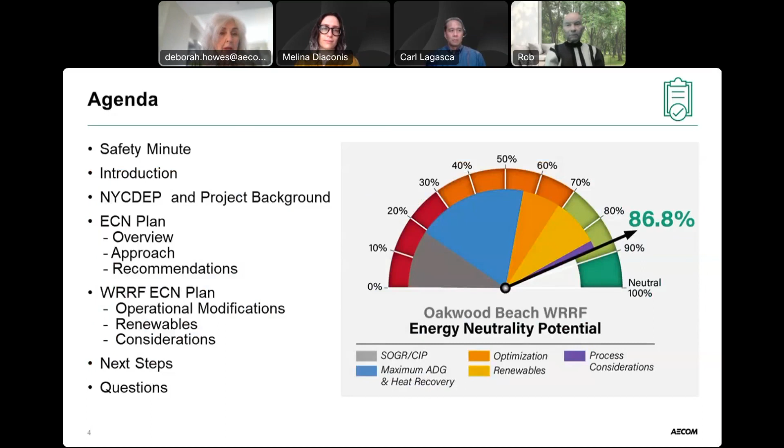So in terms of that sustainability moment, some things you can do to really save some energy. Decreasing the brightness of your screens can save quite a bit of energy, I think it's like 20% savings. Another thing you can do is, remember how we were told it's going to be a paperless world? We never got there. But we have been saving a lot of our documents, draft after draft after draft, digitally. And if you ever looked at your hard drive or your C drive or other disk areas, you're finding you're piling up so many versions, and you don't need that. That's wasting energy, turns out. Please spend a little bit of time, weekly, monthly - yearly is really too long a period to go - and clean those out, delete them. Please do that.

All right, now I want to introduce you to some amazing, really brilliant people, I call them warriors of the rainbow, saviors of the planet, because these are the people who are really moving us forward on the path we have to go. Carl Lagasca is a vice president with AECOM and an Envision Sustainable Professional, with over 25 years of experience in facility planning, design, services during construction, and program management for water and wastewater treatment projects. He has extensive experience, particularly with energy-related projects for the New York City wastewater treatment facilities. He has been the design manager for the development of the New York City DEP Energy and Carbon Neutrality Plan on the New York City DEP Wastewater Resiliency Program. He is our design manager, VP, and professional engineer for the New York City DEP Energy and Carbon Neutrality Plan. Carl, thanks so much for bringing this back to us.

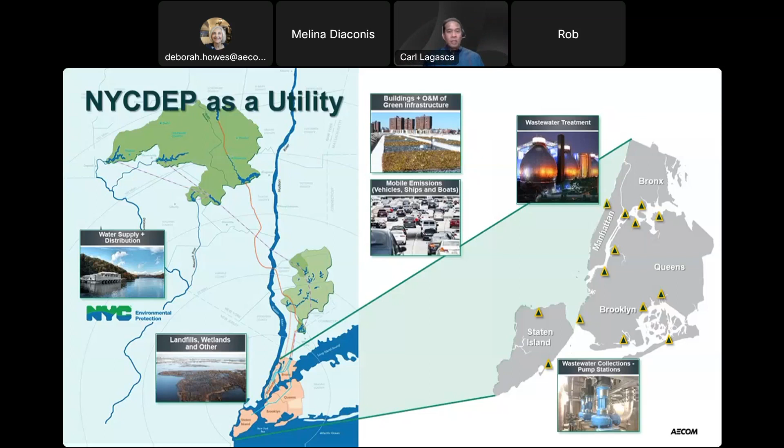In addition to all these buildings and assets, DEP also oversees the management of acres and acres of watershed, forestry, and wetlands. So this is supposed to show how much DEP is in charge of, and what we had to grapple with when producing an energy and carbon neutrality plan, and all the things that came into play.

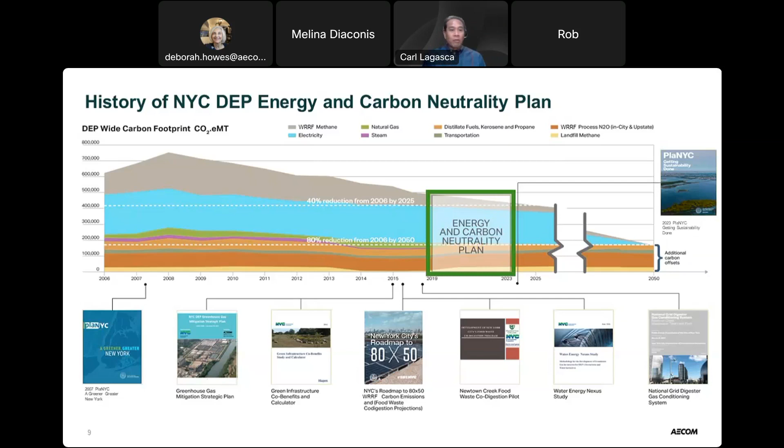So what I'm going to do now is hand over the presentation to Robert and Melina, who led a lot of the technical work of this energy and carbon neutrality plan, specifically on that wastewater sector and the contributions. What they're going to do is walk us through AECOM's approach, our decision making, the evaluations, and all the recommendations for those energy and carbon measures that were proposed for these different wastewater resource facilities. So, Rob, if you want to take us through.

Sure. Thank you, Carl. I'm going to pick up where Carl left off. I'm going to do a quick overview and maybe repeat some things, and then I'm going to focus in on the approach and leave the recommendations for Melina.

So what you see here is what Carl had mentioned, now in writing. On the left-hand side are the DEP objectives, and that's important because the municipality needs to come up with the goals. What are the goals so we can achieve those? In this case it was 80% greenhouse gas reductions by 2050. And for other facilities, just simply go by a date — carbon neutrality by a date, in this case 2050, agency-wide, but energy neutrality in all in-city plants.

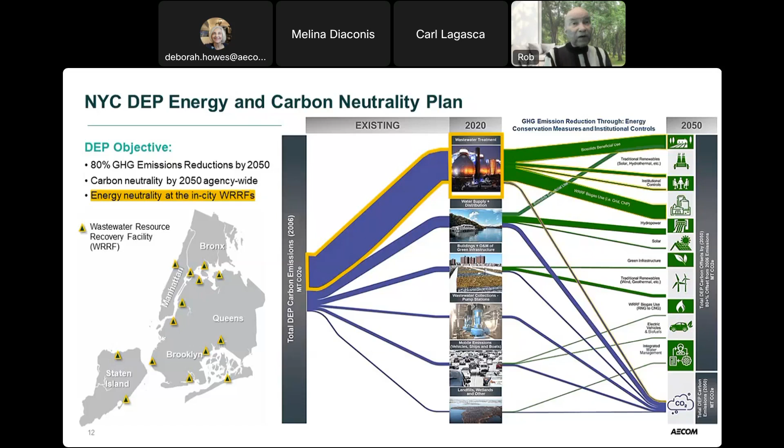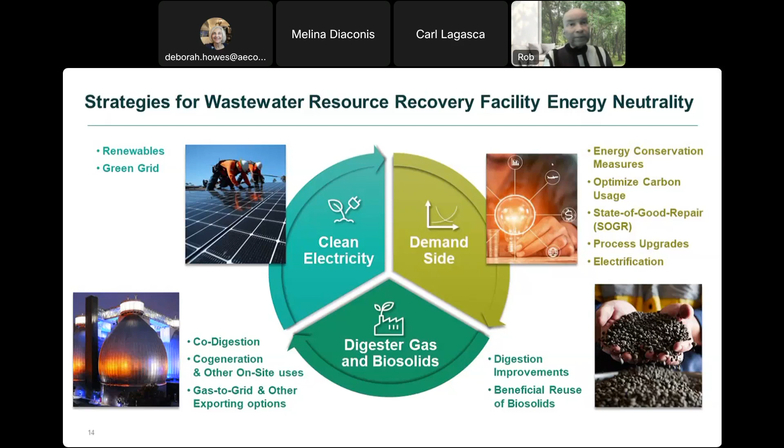So just to reiterate and put it in priority, digester gas production and utilization seems to be the max. You can get a lot out of that. So you want to look to increase digester gas production and maximize that usage. Check your flaring and venting, and then look at the carbon going through the process. Not an easy step, believe me, but all the wastewater that comes in is carbon loaded. A lot of that is going to be used up during the biological treatment to produce a quality effluent, but the remainder can definitely be reused.

You want to look at heat recovery. So again, if you're using your gas, you've got a boiler—let's use that to maximize the amount of heat. You want to heat your digester and the building, and then during the summer, use that heat for cooling. But if there's excess, you could definitely find a use for that. And then optimize your process—keep an eye on that. These are three objectives that could generate more energy and reduce operating costs.

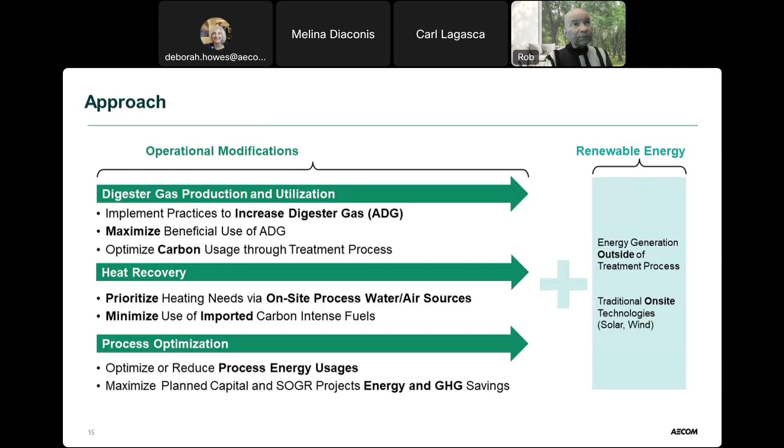Renewables, definitely, if the institution is accepting that and is willing to say, yeah, let's get some food waste in—definitely use renewables to increase that. And then, as I noted, process, there's a lot there. A lot of it falls on aeration. A lot of facilities seem to over-aerate, but there may be reasons for that for operations. Take another look and see if that could be cut back or honed in. Use things like other instruments for testing.

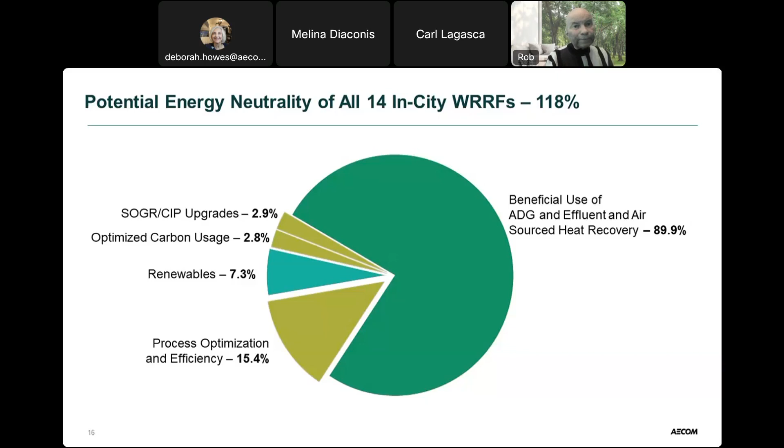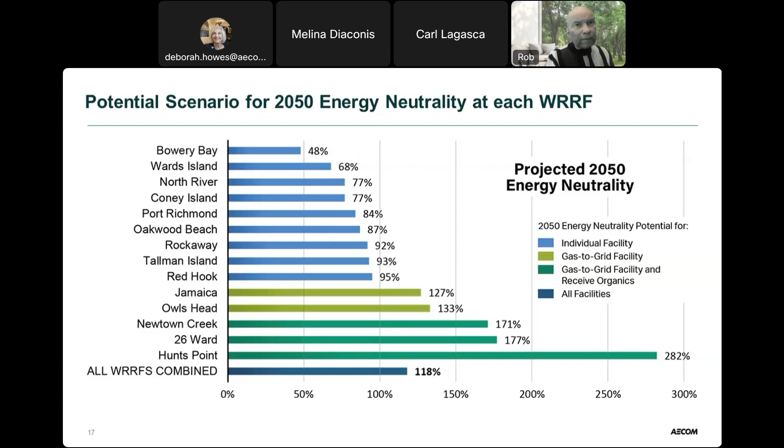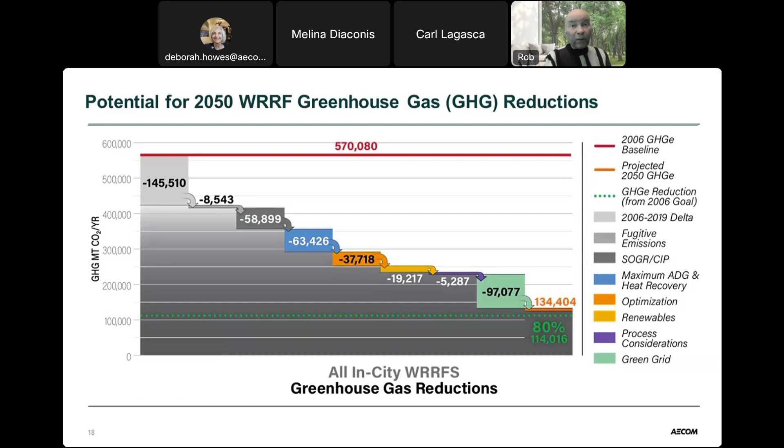Now I'm going to turn it over to Melina, who's going to talk about the renewables and the other technologies that can be employed. Thank you, Rob. So I will take you through the various technologies that we did recommend through this process, including operational modifications and renewable energy, and then I will close us out with the other considerations that were taken into account. So for the operational modifications, we'll walk through each of those three different categories.

We'll start with co-digestion. Co-digestion was the initial operational modification that was evaluated, which includes co-digesting organic waste such as fats, oil, and grease (FOG) with sludges. This is an increasingly common practice in water reclamation facilities in order to divert organic waste away from landfills and harness these highly digestible wastes to increase digester gas production.

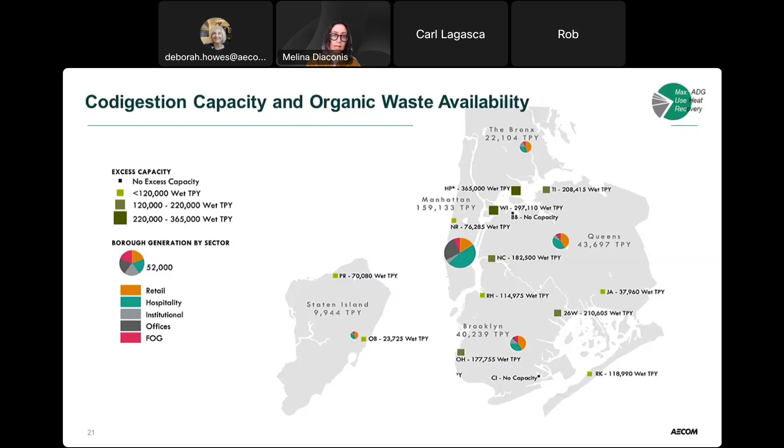As noted earlier, heat demand for the digesters is a significant energy demand of facilities and subsequently also supports the generation of digester gas. So to prioritize and optimize the use of on-site resources, heat recovery technologies were evaluated in combination with digester gas use to meet the heat demand.

The intent for DEP is to completely move away from fuel oil, natural gas, and electricity as heating fuels, which have higher emissions factors than digester gas, especially as the grid is decarbonized. While some of these technologies do generate electricity as well as heat, that wasn't the priority for this evaluation.

It's important to note that where digester gas is used in boilers today, a variable portion of that is regularly sent to waste gas burners, and that flared gas is a lost energy resource. To mitigate flaring and maximize digester gas use, another beneficial use technology would need to be installed, and therefore boilers were ultimately not recommended as the primary heating application, even though they do have a high efficiency. Because of the high efficiencies and the removal of combustion emissions, heat recovery was determined to be the ideal technology option where possible.

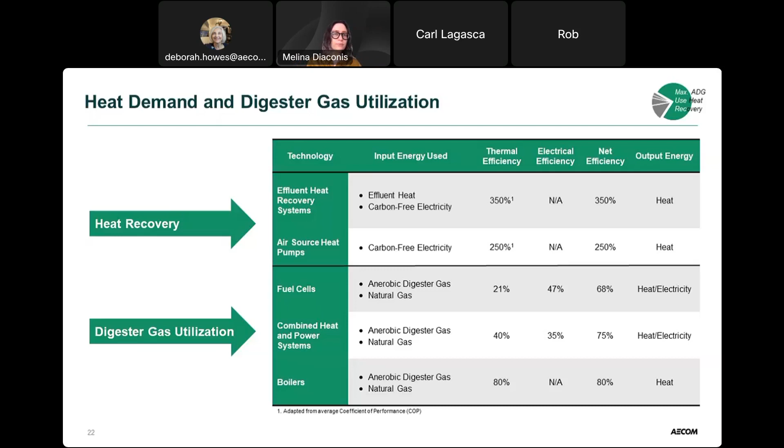With the priority on heat recovery technologies to meet heat demand, this allows for all the digester gas to be used for gas to grid. However, we did consider several applications for digester gas utilization.

If a facility cannot directly connect to the local gas grid or a neighboring user, biogenic compressed natural gas, or bio-CNG, is an alternative option for the clean digester gas. However, additional equipment and footprint is required to compress, store, and fill for transportation, and due to transportation, it generates more emissions during its life cycle.

Fuel cells are a comparable application to combined heat and power engines. However, it not only achieves a higher percent neutrality than CHP, it also produces less emissions because it does not utilize combustion to produce heat and electricity.

Finally, biodiesel is currently not a viable option. However, because that technology is only in the pilot stage, as that technology evolves, it should be evaluated in the future. It does convert digester gas to biodiesel or possibly jet fuel, so there's flexibility depending on the markets.

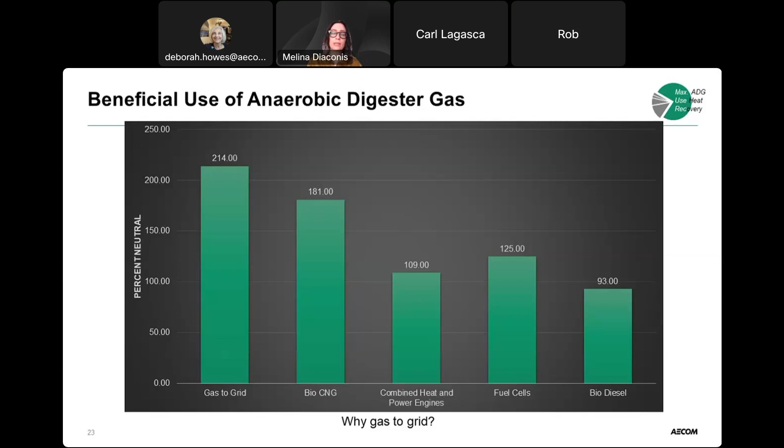Optimization efforts are the last leg of the operational modifications, and there are three main areas where energy reduction measures are recommended to install more efficient equipment, as well as automated controls.

For aeration or secondary treatment, existing styles of diffusers were evaluated against ultrafine bubble and membrane fine bubble diffusers. While energy reduction was the priority of this evaluation, impacts on operations were also considered.

For example, with ultrafine bubble diffusers, they're not interchangeable between manufacturers. They require going out of the country for repair and replacement. They have the highest capital cost. They're also prone to clogging, which requires regular cleaning, and we didn't expect that would actually occur from our conversations with the facilities.

So while diffusers are going to be replaced, we didn't actually recommend ultrafine bubble diffusers in the future. We recommended membrane fine bubble diffusers where possible.

There's also various styles of more efficient blowers that were evaluated, as well as refurbishing existing blowers. We looked at channel mixers or separate channel blowers instead of using excess process air. And with the addition of automated controls, there's also the opportunity to even reduce the number of diffusers currently in the design.

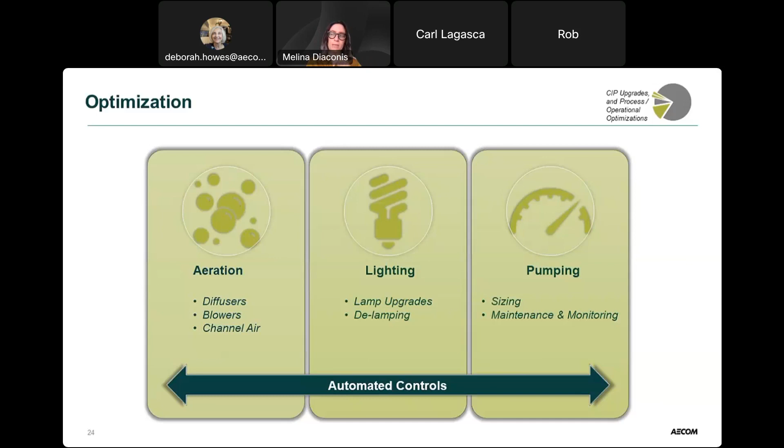Finally, for pumping, initial recommendations were to select more appropriate and optimally sized pumps when upgrades are being planned. An option for some pumping systems is to install pumps of multiple sizes to cover a range of anticipated flow rates. There's also variable speed control to provide an opportunity for pumps to better match incoming flow rates. This minimizes pump starts and stops and helps keep the pump in a more efficient range, which reduces wear. Finally, we also explored best practices for pump maintenance and monitoring programs to manage pump efficiency through its lifetime.

Finally, on optimization, there were some technology-specific options to reduce energy use, produce more digester gas, and upgrade the systems. The first one, sludge thickening improvements, involves separate thickening of waste-activated sludge with gravity belt thickeners. This increases the percent thickening and subsequently increases digester capacity, which therefore increases digester gas production.

Chemically enhanced primary treatment optimizes the carbon captured within the treatment process to increase digester gas production and actually decrease air requirements for secondary treatment. For facilities that have side stream treatment of centrate, an Anammox-based technology was recommended for the lowest energy demand.

Finally, there were several operational upgrades already in the capital plan for DEP that save energy, and those were captured in our evaluation because they haven't occurred yet. Those items included things like more efficient HVAC systems and new digester mixers.

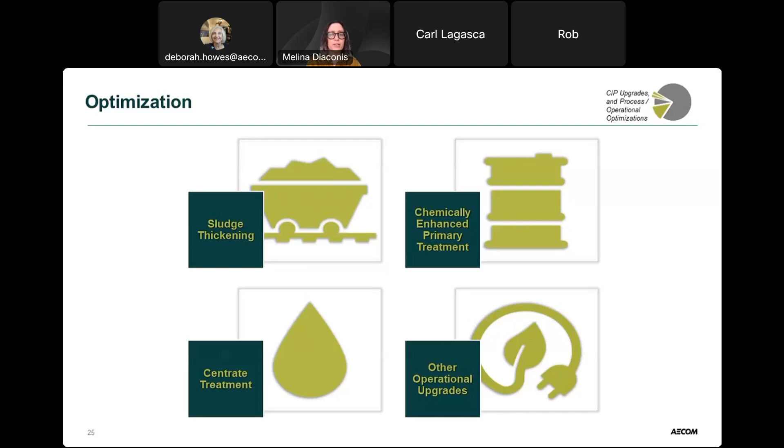So for renewable energy, the major energy usage in a wastewater facility is electric, and therefore any renewable power generation technology can provide a benefit to potentially offset that usage.

Solar power actually has the most potential for renewable energy generation at the New York City in-city wastewater resource recovery facilities. The solar analysis established boundaries of each of the 14 facilities. We identified potential locations for solar installations, categorized each from green to red, as you can see in the example here for Newtown Creek, and then modeled potential solar energy production annually.

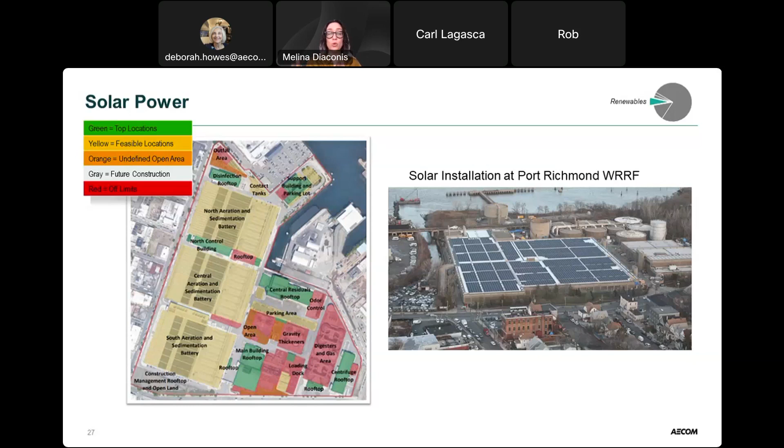Annual production for each of those facilities achieved anywhere from 0 to 17% of a corresponding facility's current electricity use. Those with low production potential either don't have accessible outdoor space or already have maximized their solar coverage. For example, Port Richmond, shown here, is one of those facilities, and they currently have about 1.85 megawatt capacity. DEP is actually planning next to add about 12 megawatts of capacity and 10 megawatts of storage at Wards Island as their next location.

For hydropower, we did explore microturbines, but there were only 3 of the 14 facilities identified with high enough average flows and available total dynamic head to make installation viable. There are a couple of different styles of microturbines shown here for the outfall configurations of those facilities, and there are other styles, but these are the ones that worked with outfalls within New York City. So for any facility evaluated, you'd have to see which style fits with the outfall.

While microturbines should not impact the upstream treatment process, there is a risk as well as potential constructability issues to consider, especially since the hydroelectric generation we found with these microturbines only accounted for about 1 to 3% of each facility's current electricity use.

Regarding wind power, it's not expected to have a significant impact on neutrality either. There were 3 DEP facilities within the city identified with the best wind patterns; however, they have permitted height restrictions of 11 and 26 meters, which only allows for small turbines to be installed, and they have negligible generation potential.

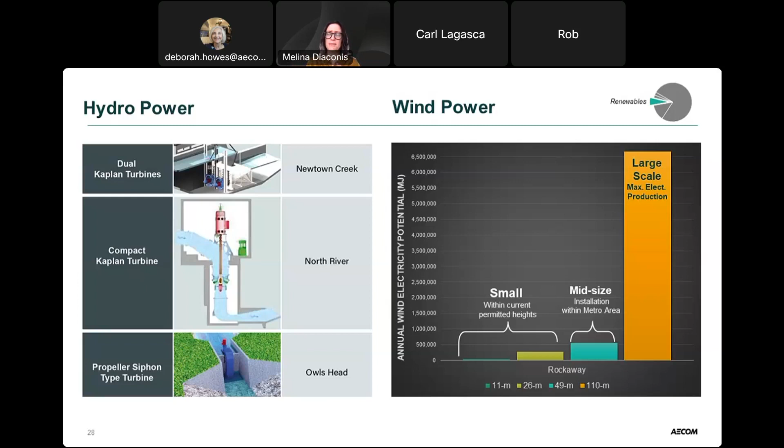You can see that 11 meters is barely visible on the graph shown here for the Rockaway facility. However, based on other local turbine installations as precedents—Sims Metal Management in Brooklyn near the Owls Head facility, and Oak Street Pump Station in Bayonne, New Jersey, across the channel from Staten Island—we performed a sensitivity analysis for single mid-sized turbines, those being 49 meters or 160 feet. Assuming DEP could install these mid-sized turbines at viable facilities, wind still only accounts for about 1.5% of each facility's current electricity use. With larger turbines, there is exponentially more generation potential. The large scale shown here is the maximum for land-based turbines in the US. So if DEP does pursue wind power, it's recommended that turbines be sized somewhere between the mid-size and large-scale turbines. However, with the extensive permitting effort that would be required, as well as the cost for the power generated, these in-city projects are unlikely and lower priority.

So there are a number of considerations when selecting the projects to pursue that DEP needed to consider, because while they have a pathway to energy neutrality with the implementation of these recommendations, there should be a balance of risks and benefits of these recommendations.

Those risks that can be defined have been incorporated based on what's known, but we can't predict how that may change. So with sea level rise, for example, the receiving water body levels may rise above effluent outfalls, and then the effluent would need to be pumped instead of flowing by gravity, which would increase energy demand. This is not currently projected to occur within our evaluation before 2050, but those models could change.

And on the benefits side, there is an environmental justice impact. Wastewater resource recovery facilities are typically located in disadvantaged communities, so improvements in emissions directly improve the conditions of those neighboring communities. In addition, many of these energy control measures make these facilities more climate resilient through reduction of energy demand, generation of electricity on site, and production of renewable gas.

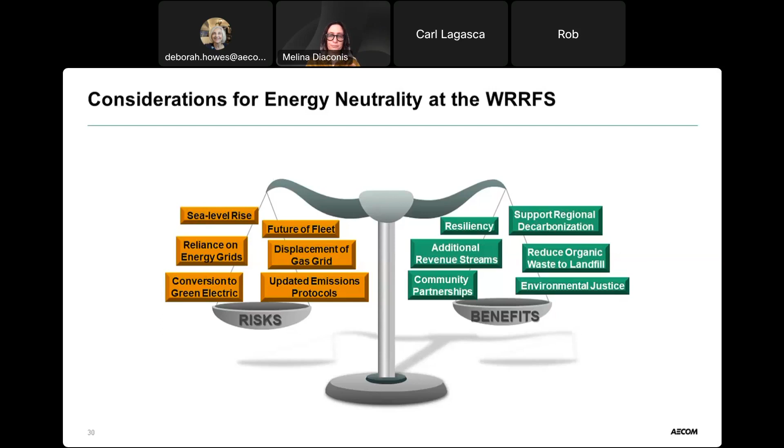So this study has really shifted DEP's perspective from a narrow agency-only interpretation of carbon neutrality to one that leverages DEP's unique infrastructure to help New York City as a whole decarbonize. DEP has already started implementing recommendations from the analysis, particularly around maximizing co-digestion capacity and pursuing gas-to-grid projects. In fact, the organics circular economy vision set out in PlaNYC, which Carl mentioned earlier, builds off of this project's analysis, and it was a solid starting point to get the agencies in New York City to break down traditional operating silos.

So with the analysis of WRRF opportunities really wrapping up at this point, the Energy and Carbon Neutrality Plan is now diving into opportunities across DEP's watershed and collection system. And although these were a smaller contributor to DEP's greenhouse gas inventory in the Sankey diagram shown earlier, they actually may have outsized potential, especially around hydropower, forest land management, and potential heat recovery options.

So thank you very much. I'm going to turn this back over to Deborah to open this up for any possible questions.

Thank you. Thank you so much, Deborah. How you doing? Wow. I know we're going out of sequence here. Is it possible to go back to a slide, Deborah?

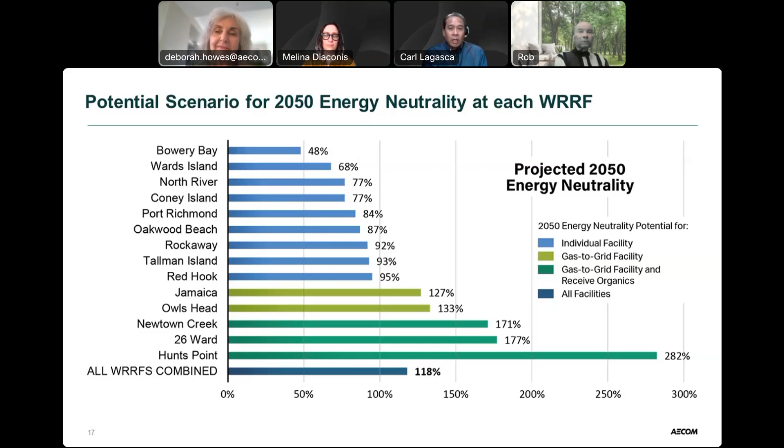Because we concentrated on energy here, the next slide shows the greenhouse gas emissions associated with them, spanning across all the sectors which Melina mentioned on her last slide. Now we're moving our study outside of the WRRFs to take a broad agency-wide look at where else we can help bring down DEP's emissions across the entire agency. You can see a big chunk gets reduced here just from our WRRFs, which gets added into the overall inventory I showed previously on that carbon footprint graph.

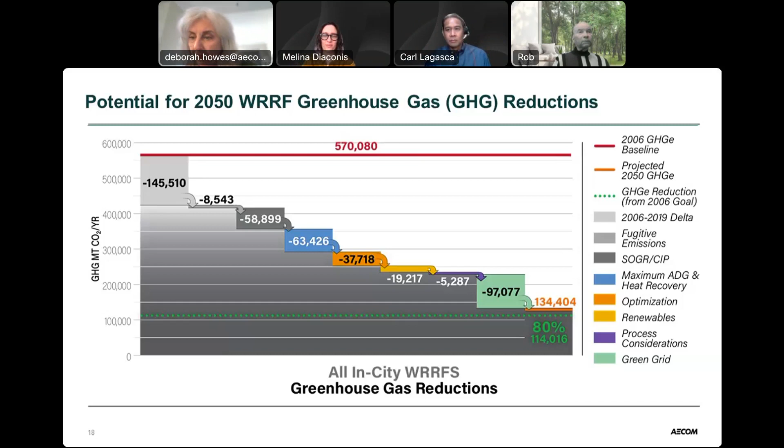I'm sorry about that, Deborah. That's okay, this is an ongoing story, and it's a complicated story. That's why I keep wanting you to come back and add to it. So thank you very much. We hope you have a couple of questions here, and if you have any others, we hope you will add to it.

One question I want to start with: did costs factor into your evaluation at all? I'll take that, Deborah. Cost wasn't the priority in our evaluation, but we did factor it in when we compared technology alternatives. For example, with the diffuser types, we looked at capital and O&M costs in selecting the best diffuser types, and we did that for a number of different technologies through this evaluation. However, the focus was really on what measures made it possible for New York City DEP to achieve neutrality, so cost was considered, but it wasn't the overall driving factor.

My question is, how big a factor are wastewater treatment plants and water treatment plants? We live in the water world and think water is the most important thing in the world, but how big a factor does water have in the overall carbon scene?

Can I take that one, Deborah? I think this question is coming from those utilities as they sit within an overall city. Like here in New York City, the city has to look at its overall carbon impact and greenhouse gas reductions impact. When compared to other sectors like transportation or other stakeholders like the Department of Sanitation, the water side tends to be lower than what most people expect. There are several graphs I can provide to the group that we looked at when we first started this, where we saw numbers suggesting that for a city, the water and wastewater side attributed to maybe less than 10% of a city's energy and greenhouse gas impact.